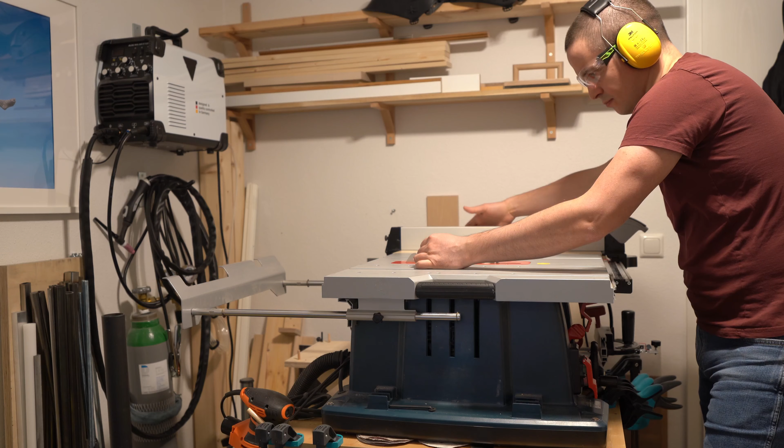So a month ago I decided I want to build a CNC. What I did have on hand was a sheet of plywood, some more thick multiplex plywood that I found on the street, some steel bars that I found on the street as well, and of course I had my 3D printer.

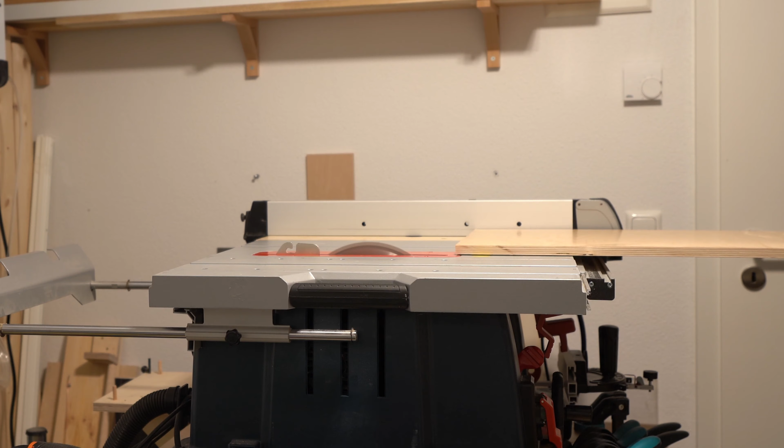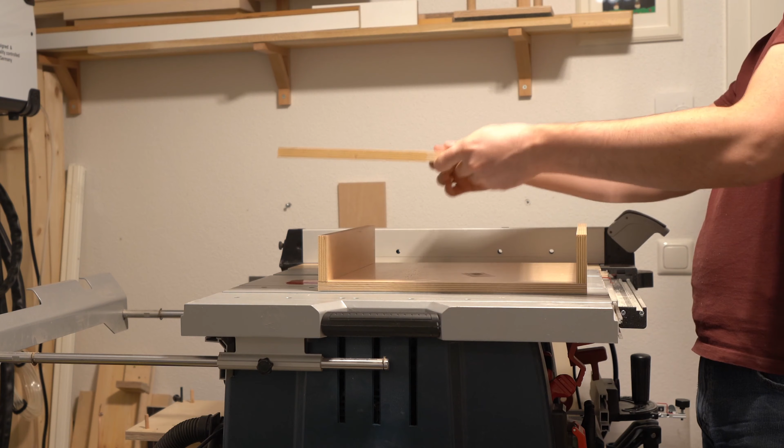Initially I wanted to buy a CNC, but I don't really have anything I need to machine right now, so I'm not in dire need of one. I also wasn't super excited about any of the models available on the market. There are a lot of CNCs available from AliExpress, typical models like 3018, 3020, 6040, but the problem with them is that the quality is not great and the rigidity is missing, and the components are not great either.

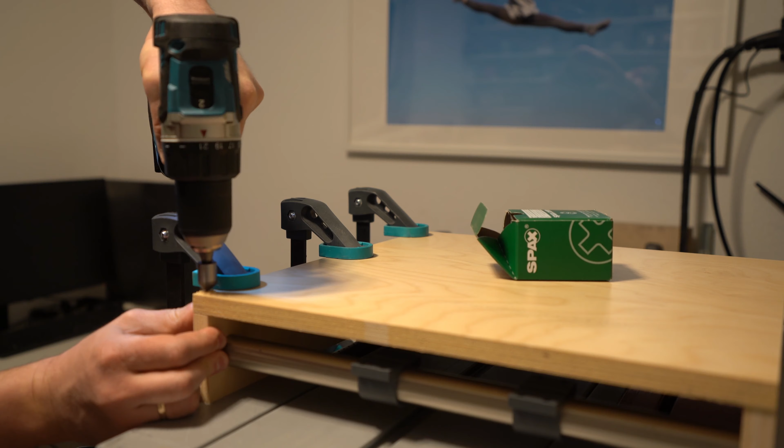So for best stability I wanted linear rails, and nothing on linear rails is really available under 1000 euro, and it's also a lot of waiting time and possibly customs. I felt like the actual components to build such a CNC cost much less than 1000 euro, so it seemed like it's worth a try.

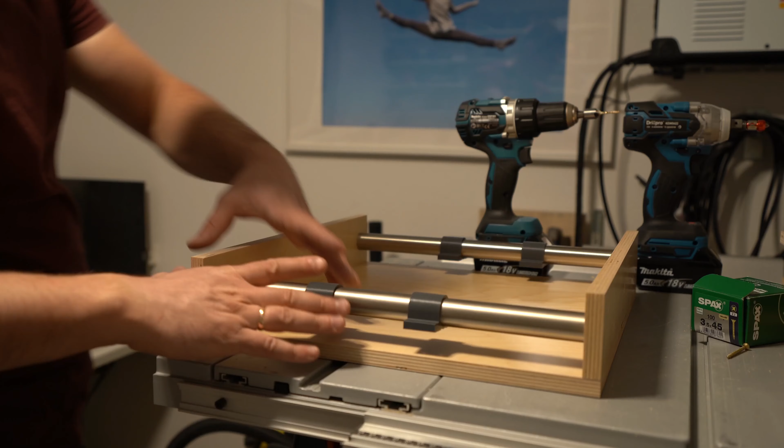Before going to linear rails, I decided to give a try to the components I had on hand, the steel tube and the 3D printer that can print the bushings.

I have no experience with CNC whatsoever, so just building my first CNC is of course a crazy endeavor. But I like it.

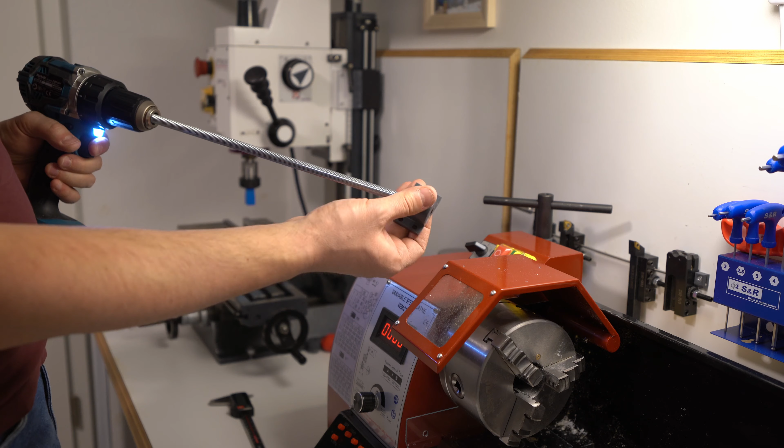So here I assembled my first version of the Y-axis, and it doesn't go smoothly. I also decided to use threaded rod for driving it. Of course, as everybody on the internet has warned me, the threaded rod is terrible for this purpose. It's meant for fastening things, not for making things move along it.

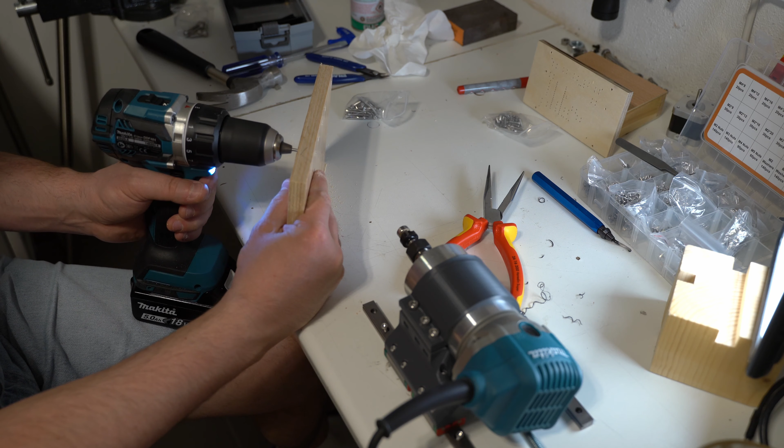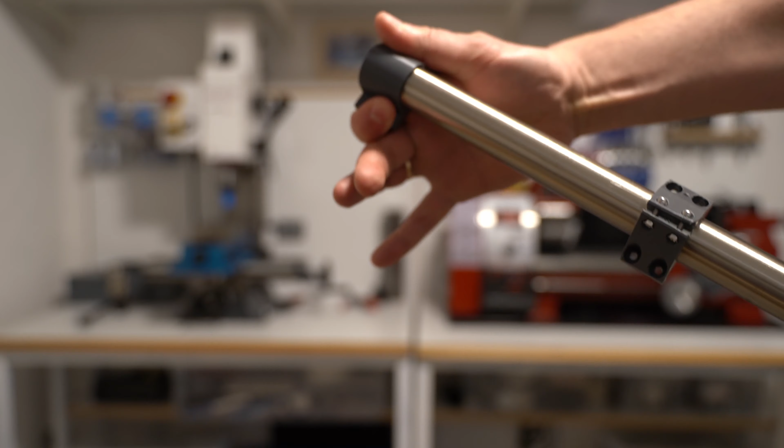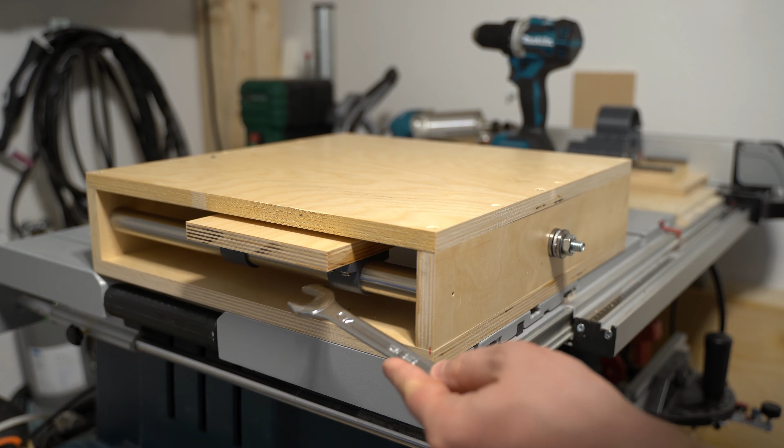Here is a comparison of just a 3D printed plastic bushing and a 3D printed plastic bushing with a special commercial bushing inside, made from steel and POM plastic. The problem is that it moves in steps, so the resistance of plastic sliding on steel, even with special gliding oil added everywhere, is still too big. There are thrust bearings on both sides here, but it's still like I can hardly move this by hand. Even with a wrench, it's a considerable effort.

I think if I put a NEMA 17 motor here, it would not even be strong enough one-to-one to drive this. A NEMA 23 will probably drive this okay, but the problem is that it moves in steps because of the big resistance.

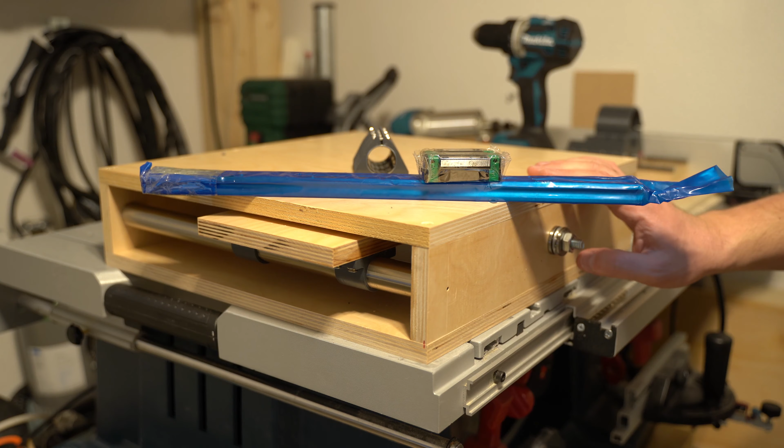If this doesn't work, then I do have linear rails, two levels above this kind of stuff. So we'll see. For now I'm just going to disassemble and try these bushings. And so of course the bushings never worked.

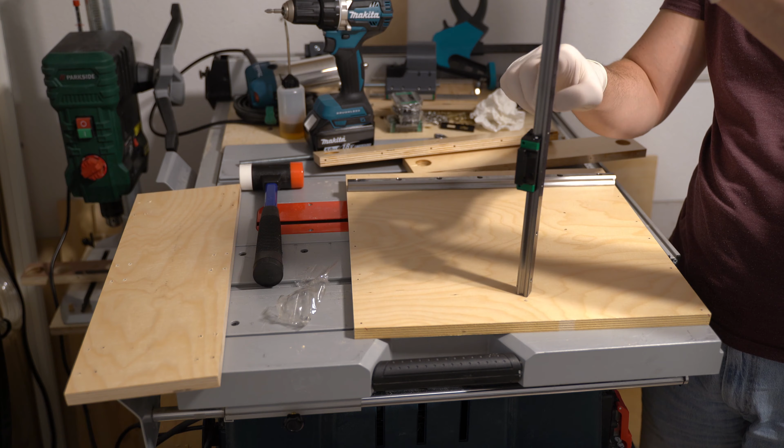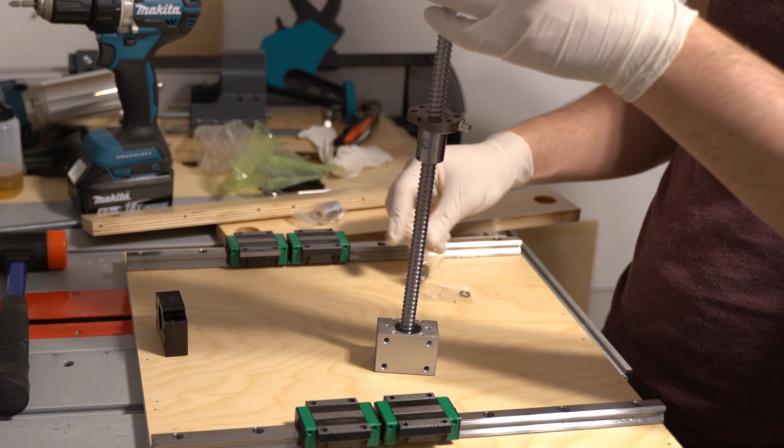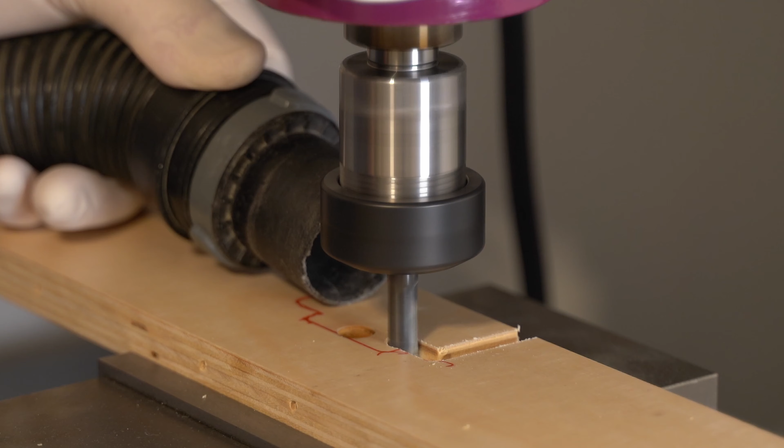I didn't want to wait a month for parts to come all the way from China, so AliExpress recently started selling out of Poland, and they come surprisingly fast. In 3 or 4 days I have the parts. The trade-off, of course, is that the quality is not great. I mean, the price is good, and I don't expect commercial quality precision parts for 40-50 euro. But still, if I paid the same price and waited for parts to come from China, I think I would get better parts.

Here I'm machining a recess on one of the plywood parts so that the lead screw can actually fit. I had no experience with lead screws or linear rails before this, so I didn't know how much space I should actually leave for everything to fit, and of course it didn't fit.

So for rails it's easy. If they say it's 400 millimeter, like what I have here, then the length of the rail is 400 millimeter. But for the ball screw it's a little different. There the length of the entire assembly is 400. These are the results for today.

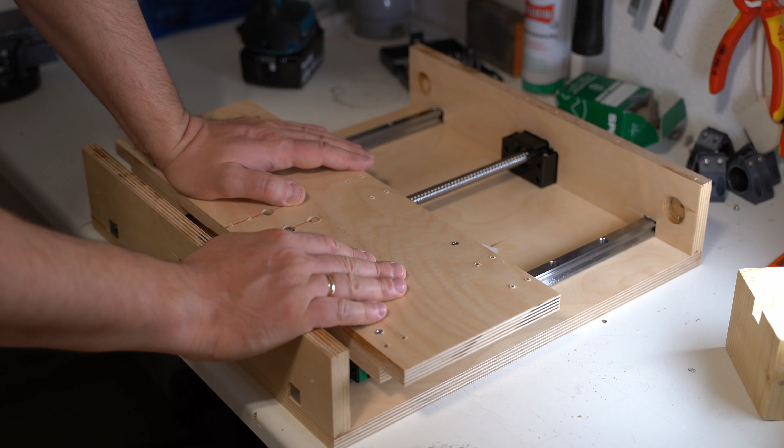It's not tidy at all, but I was just tired of sitting on a chair all day trying to design something in Fusion and wanted to get some work done. And plywood is really forgiving here. Like, if this were aluminium, it would not really be possible. I think, I hope, this machine will actually be able to machine aluminum parts when fully assembled.

I mean, who knows, but I do really hope that will happen. So for comparison, with the ball screw I can easily turn this with my hand, even though it isn't like 8mm shank, it still moves. And these linear rails, you know, they're not top quality. They don't actually slide down under their own weight, even when oiled.

But they were a good price and quick delivery. So I paid 90 euro for 2 rails, 4 carriages and 1 lead screw with bearing blocks. And there's even a coupler. Now I'll just close this up and no one will ever know what a shameful mess this is.

I switched for thicker plywood. This is 30mm multiplex birch. And it's surprisingly not easy to drill all the holes in the right place.

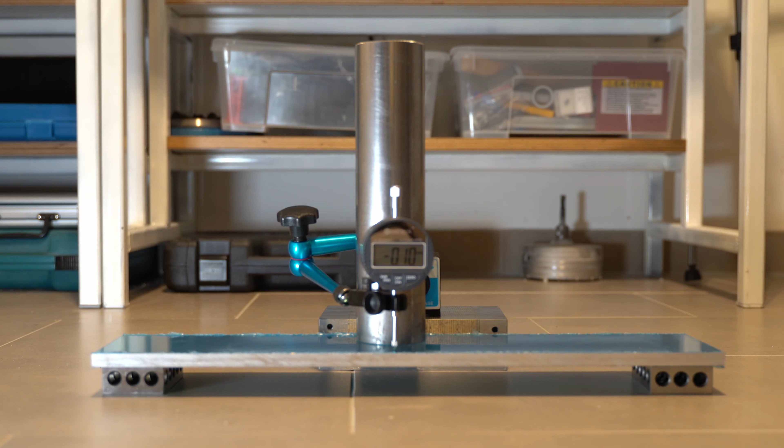I have a little test rig here that I'm using to test different materials for bending. This is 10 cm by 1 cm aluminum, and this weight is about 4 to 5 kilos. As you can see, the deflection is about 0.1 mm.

And it's pretty repeatable. So if I put more load on it, just applying another 5-10 kilos on top, we get it to 0.5 mm deflection.

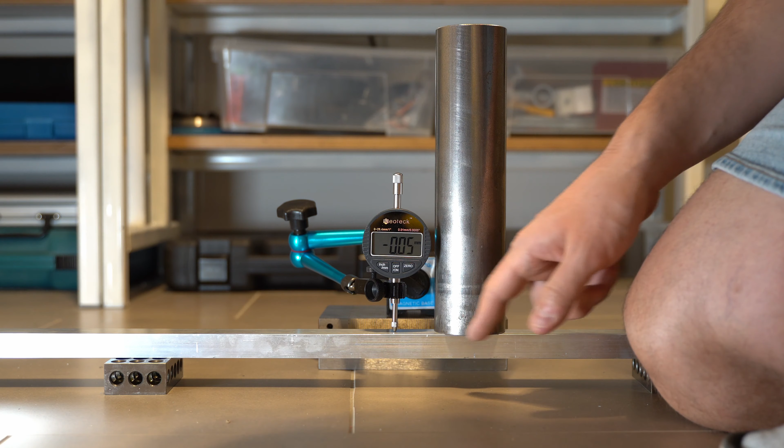Here I have a 3 by 2 cm piece of aluminum. I placed it a little bit off center, but you can see the deflection is much less. Even if I apply like 20 kilograms, it only deflects 0.05 mm. Extra centimeter of thickness really did a lot, even though the cross section of this material is 6 square centimeters. Cross section of this stuff is 10.

Now this is just plain 20 by 20 mm construction steel. You can see that it deflects even less than aluminum, even though the cross section of this steel beam is much smaller than aluminum, and it's also empty inside, just 2mm wall thickness.

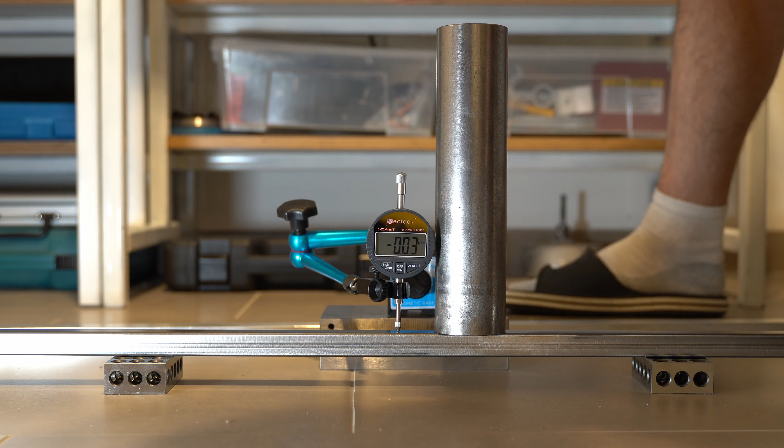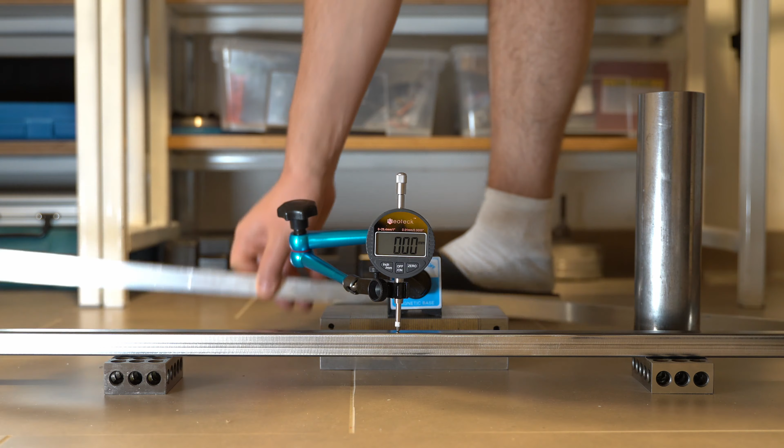So if I try to put more weight on it, it's kind of performing a little better than aluminum. And it's also much cheaper - 1 meter of this stock is 15 euro, and 1 meter of this is 5.

This is a 3 centimeter thick multiplex birch plywood. So it deflected a tenth - here I'm putting almost all my weight, and it's only deflecting 0.5 millimeter. I think I'm going to go with just thick plywood for now, so I can get a square meter of this plate for 260 euro and a square meter of plywood for 80 euro.

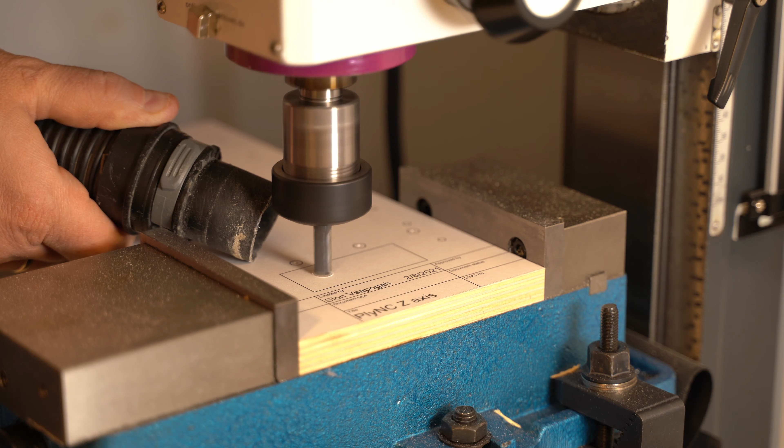A sketch for my Z-axis plate in Fusion, printed it 1:1, glued to a piece of plywood, and now I'm machining recesses for the Z-axis ball screw to sit.

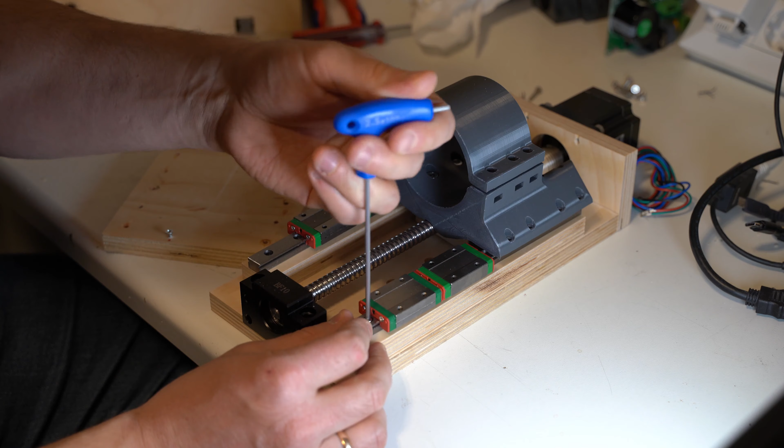I 3D printed the mount for my router that I already have, just a standard Makita woodworking router. And 3D printing is really not quite precise here, because at the bottom the mount has way more plastic. It shrunk, and as a result the holes are no longer parallel - it's more like a cone. There's a 0.5 millimeter difference between the bottom part and the top part of the plastic mount.

So I ordered another set of linear rails from the same supplier in Poland, and there's a stark difference between all 4 carriages. Most of them are very loose, but one of them is very tight, and it's not even sliding. It feels like some of the balls aren't round inside, so it's very hard to get it moving.

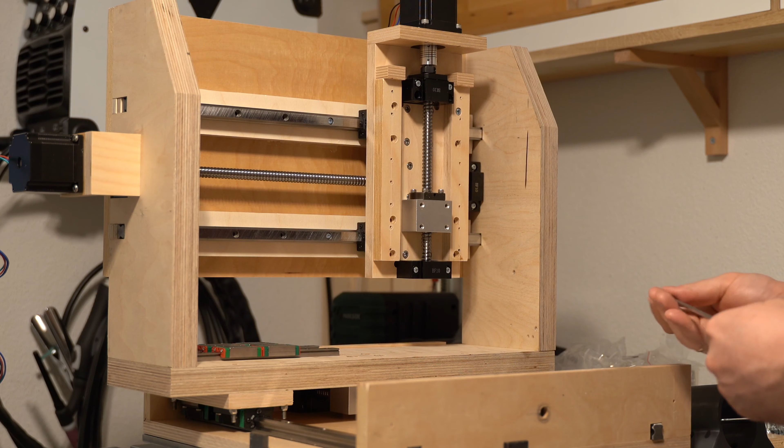I also didn't do a stellar job designing the Z-axis plate, so as you can see some of the screws between the small linear rails on the Z-axis and the big bolts that go into the carriages on the back actually collide, and I wasn't able to put in 2 screws for the small rails.

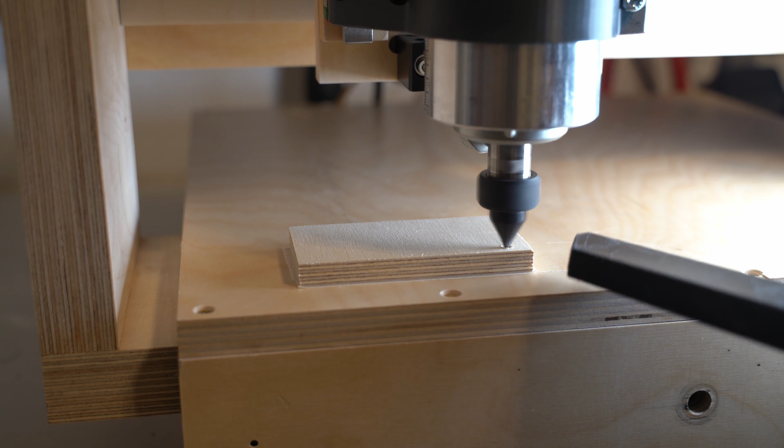Here is my first test cut. I was really unsure how it will work, so I chose the lightest workload possible: engraving wood.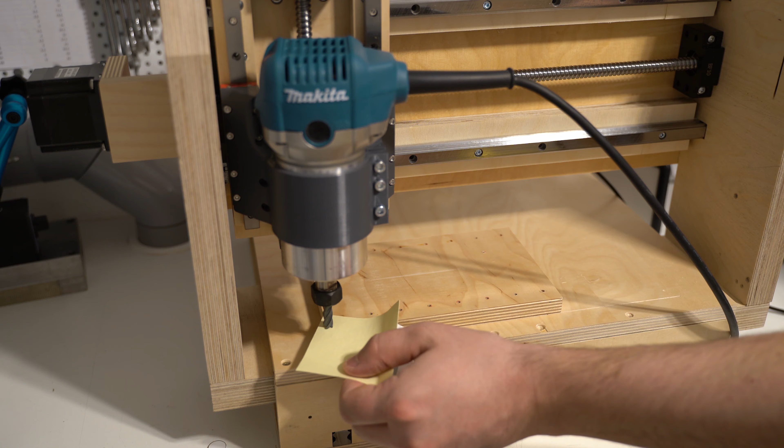Here I am setting the Z-axis to 0. And here is my first real cut with an 8mm carbide end mill that I normally use for steel. The cut went well, I didn't set the 0 properly on the Y-axis, so it kind of hit the limit a little bit.

My circle is not really a circle, it has one flat side. The dimensions also were imperfect, so it was off by 0.5 millimeter, only in one direction, not in the other.

So these cuts are actually made using those tiny drivers that they use on 3D printers. So I'm driving my NEMA 23s with those little tiny drivers that only take like 1 amp or maybe 1.5 before burning out.

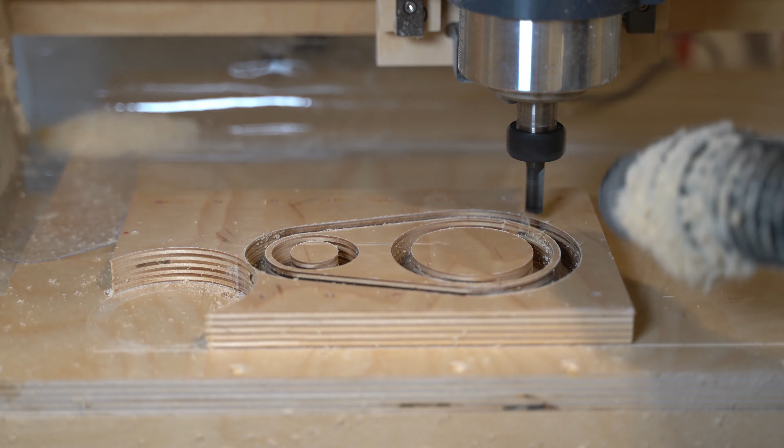Here's what's going on in terms of electronics. I have 3 NEMA 23 motors, rated up to 2.8 amps and 1.2 Nm torque, 54mm long. Initially they used to be plugged into this board - this is Makerbase MKS DLC V2.

It is basically an Arduino Uno board, but with more convenient connections. The stock version of this board comes with 3 drivers. They get really hot, only work at 12 volts, which I used to supply with this power supply. And I didn't have these drivers at all, so it was just this little board, 3 motors, and it worked for wood.

Then I wanted to get more torque on these 2 axes, and I installed these 2 drivers. These are DM556 drivers from AliExpress, €10 each, and they work okay. They're rated up to 5 amps - I'm only driving them at around 2, but they're actually taking even less.

So it's funny, there is a table over here saying how much peak amperage they would take. But since I'm powering this with my lab power supply, I see how much current they actually use, and it's always under 1 amp total, even when I move both axes. So the peak current table on them isn't continuous current - I can probably bump up the current settings here even higher.

So here is how it's currently set up. I have this board, it's connected to a computer via a USB cable, and on the computer I have OpenBuilds CONTROL, which is a free program to run G-code on the CNC.

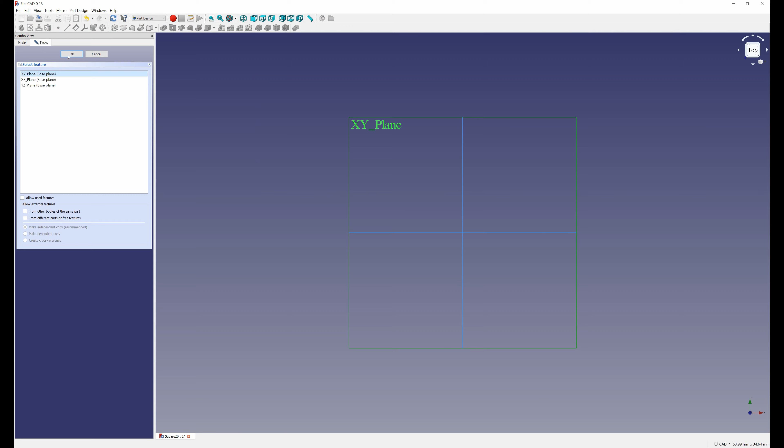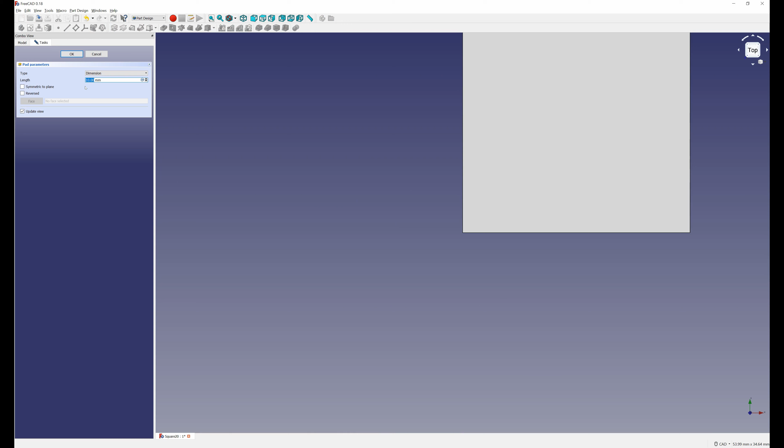First I create a document, then I create a sketch, much like in Fusion, and on the sketch I make a 2-dimensional drawing. In this example, just a rectangle, a square with 20mm length on each side. I will pad this sketch to the height of my material, 14.7mm, and then I will switch to the path workbench, which is what's used for CAM in FreeCAD.

Create a new job in here for this body. I don't need any offset for extra stock, and then I will set the origin to this point so that my material is in the negative Z. Add the tool that I have, 8mm carbide, and set the tool speed. This is horizontal speed and this is vertical speed for drilling.

Give the name to my output file, and change the format to grbl, which is what my control board understands.

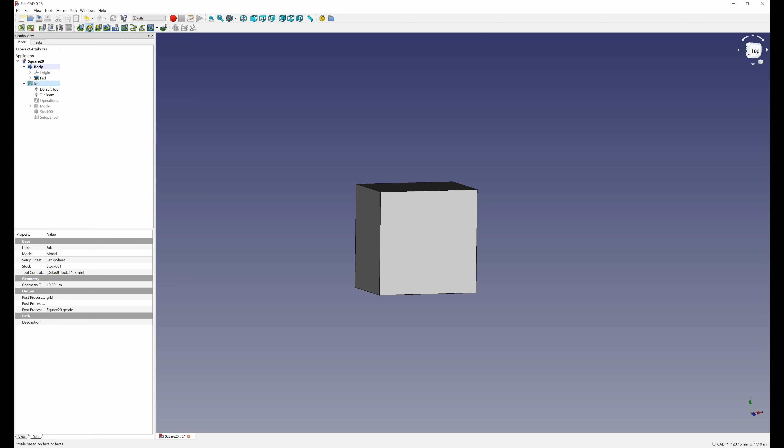Now I need to create the operation to actually remove the material. So I pick the operation that can take faces as an input. I select 4 sides and say that I want to cut them from the outside, add them to the base geometry, and set the step down to 4mm so that it doesn't go too deep at once.

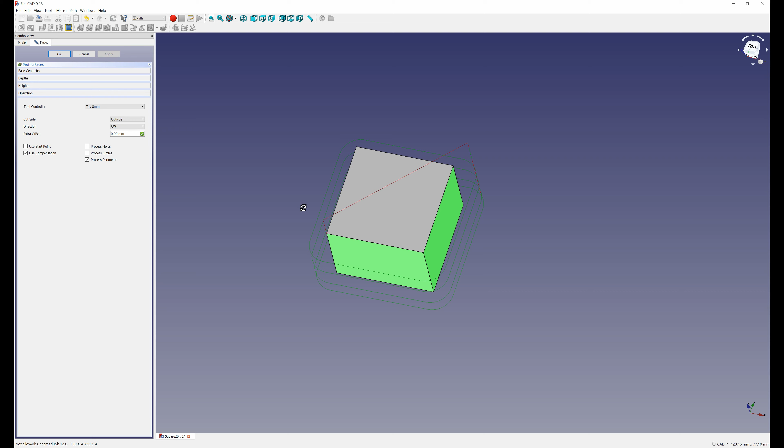And now I can preview my toolpath, which looks reasonable. I can also simulate it, and then export it as G-code.

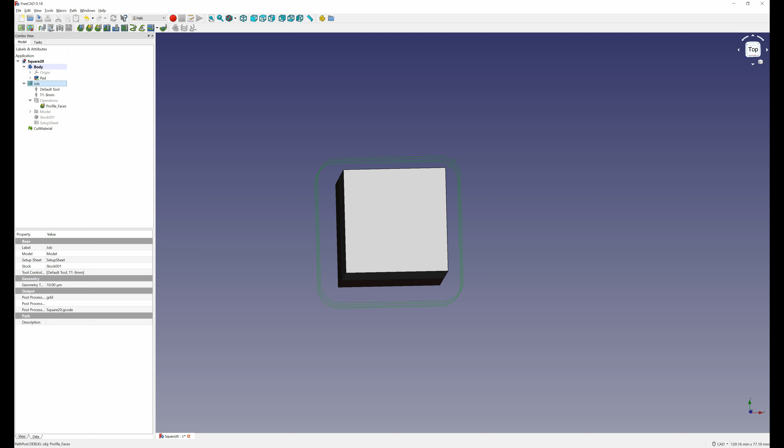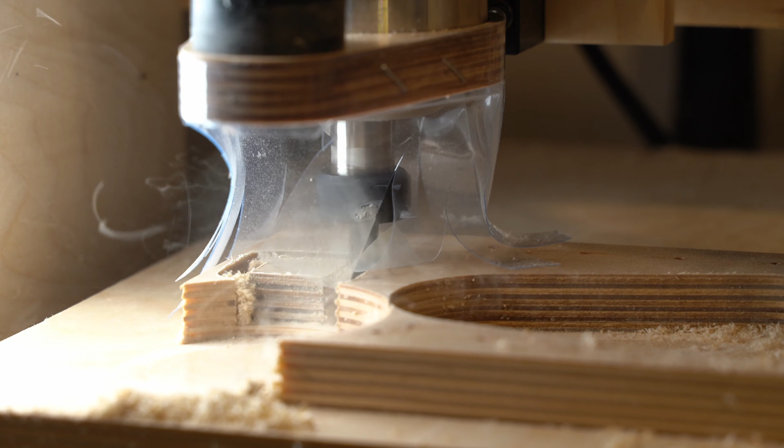The G-code can then be directly imported into the OpenBuilds CONTROL. There I set the machine to 0 and click start.

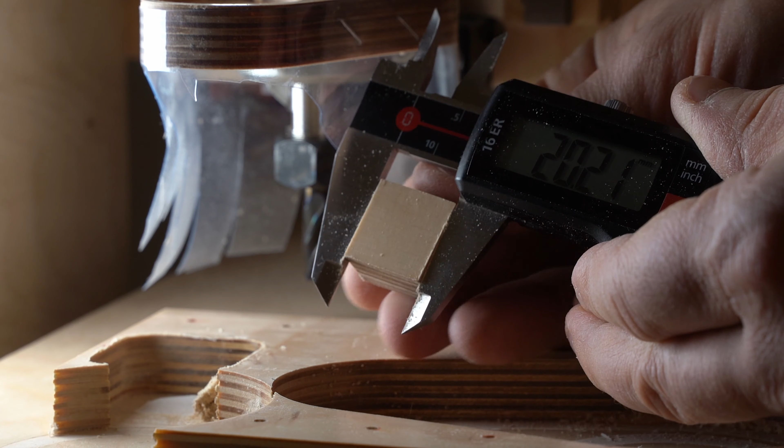The entire operation took just over 1 minute, and the precision is okay, so it's 2/10 oversized on one side and 5/10 oversized on the other side.

So I had more problems with precision initially because I used OpenBuilds' calibration tool, and it set my steps per millimeter to something like 100.1, while it should have been just 100. Then I later went into the settings and manually set it to exactly 100, and I got precision of 0.1 millimeter on both X and Y.

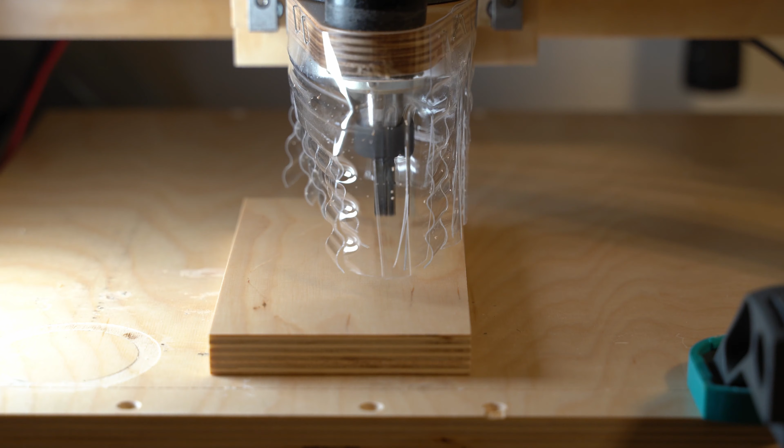So you saw me cut out the dust hood. Here I'm cutting with my first dust hood, the second dust hood, but actually the current version of the dust hood that's on the router right now is the best one that I have.

The plastic is just the sides of a 5-liter water bottle.

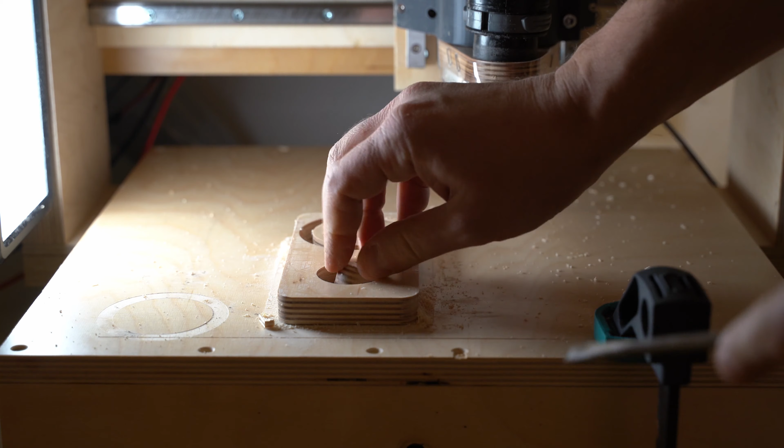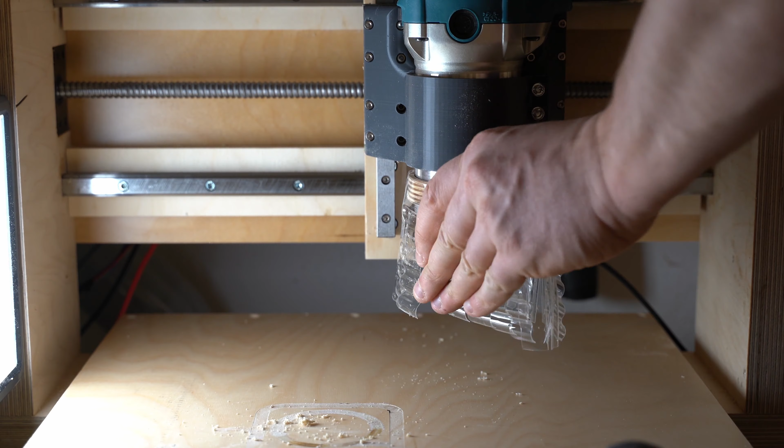As you see, I attach my material to the bed with double-sided sticky tape. I'm using good quality Tesa tape, which doesn't leave any residue. It's pretty strong. The only problem is if the end mill touches it, then it kind of messes it up, and it's hard to remove from the surface afterwards. Sometimes I even have to use acetone. But I think other tapes would have the same problem.

Here you can see another version of the dust hood. This one didn't do as well. You can see the chips flying left and right.

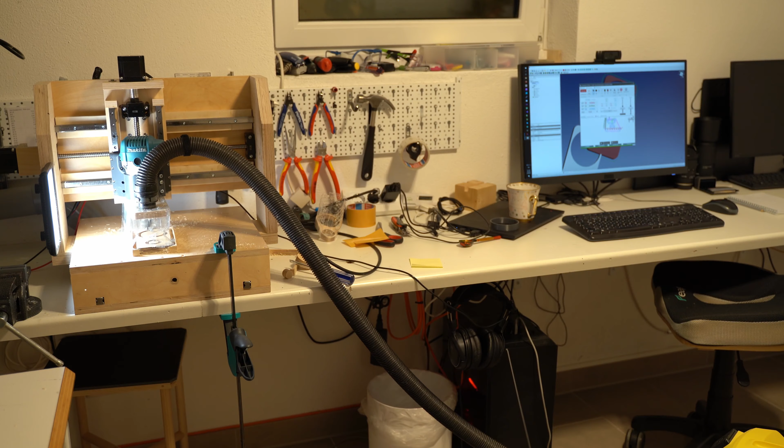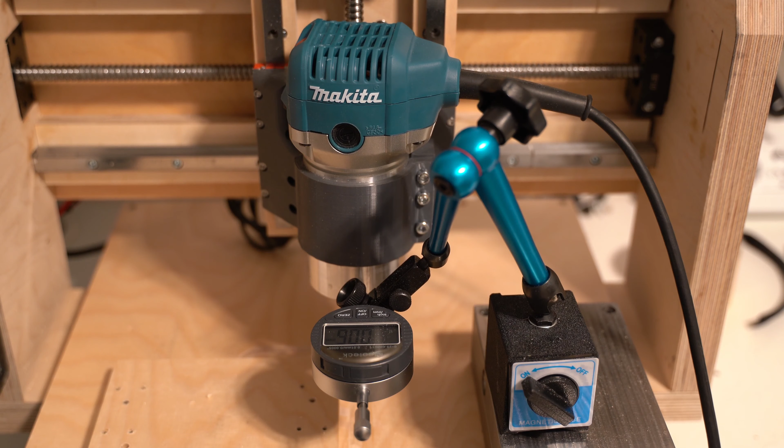Here is what I have in terms of rigidity. If I pull with all my force towards me, then I get a deflection of 0.5 millimeter on the y-axis. And if I push on it, I can get about 0.4.

For the x-axis, it's better. If I push on it, I can get about 0.4 to the left and 0.2 to the right. I wonder why it's different. Probably because of the carriages being so weird on the back of the z-axis.

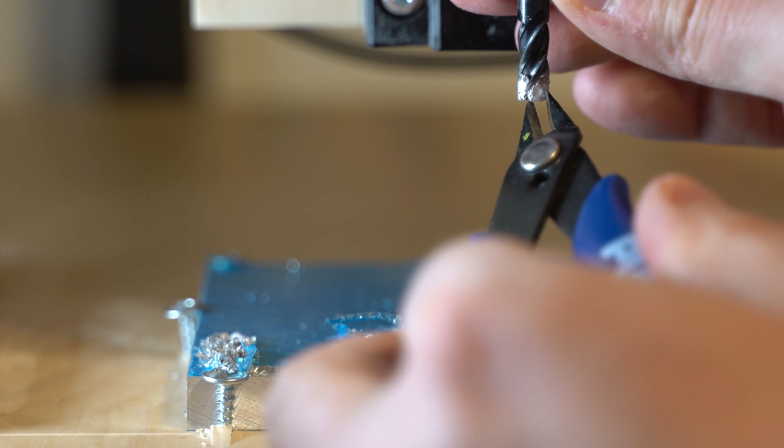Well, I think the answer is that the machine does have sufficient rigidity to cut aluminum, but I need to dial back my depth of cut, and I also need to figure out chip evacuation.

Because what's currently happening is that aluminum just gets clogged up on my end mill and it starts melting aluminum instead of cutting it. And then at some point the router just cannot spin the non-cutting end mill anymore. This is really damaging the router. So I'm going to pause the aluminum experiments for now.

But I really like how the 4mm depth of cut went over here. In all of the preparation I forgot to change the G-code from a wooden G-code to aluminum G-code, and so here it ran 4mm depth of cut. It actually did a good job on this path and this path.

I know it's advisable to use single flute end mills for aluminum, but mine didn't arrive yet. It's also good to have coolant blown onto the end mill with compressed air, but wood and coolant wouldn't work well together. I also don't want to have aluminum chips blown all over the place, so I would need to figure out some kind of solution here.